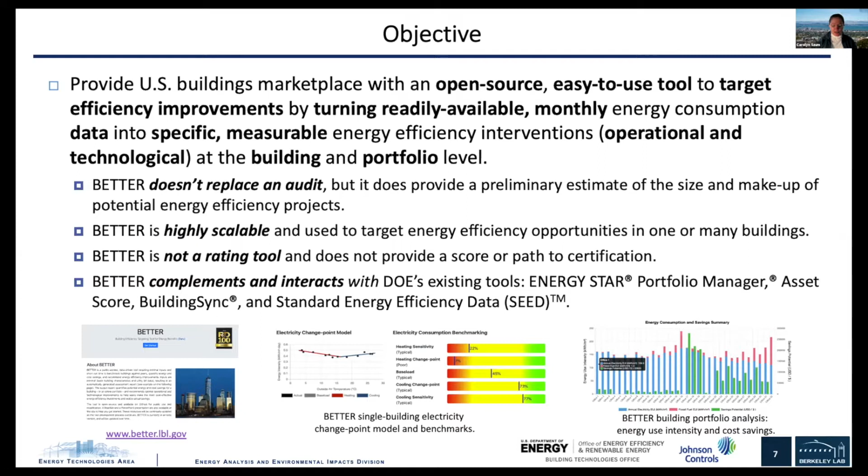Better is not a rating tool. It doesn't provide a score or a path to certification. And it's designed to be highly complementary and interactive with U.S. Department of Energy's existing tool set, including products like Asset Score, the Standard Energy Efficiency Data Platform, Building Sync, and of course, U.S. Environmental Protection Agency's Energy Star Portfolio Manager tool, which is being used by nearly a quarter of U.S. commercial space to benchmark performance.

So with that introduction to Better, I want to give you an overview of how Better works to, again, target and prioritize energy efficiency opportunities in buildings and portfolios at speed and scale.

Better takes in basic building data, and I'll talk a little bit about the data required to run Better in a moment. Weather data from the National Oceanic Atmospheric Administration database, and energy consumption data, so the monthly utility bill information. Better pre-processes this information and develops inverse models or change point models for each and every building entered into the analytical tool.

For those of you who are familiar with the ASHRAE Inverse Modeling Toolkit, you'll be well versed in inverse modeling, also referred to as change point modeling. But essentially what Better is doing is very quickly creating plots for each and every building, whereby the average daily energy use intensity for a building for any given month, or for the past 12 months, the past 24 months, the past 36 months, is compared to the average daily outdoor air temperature for that same month.

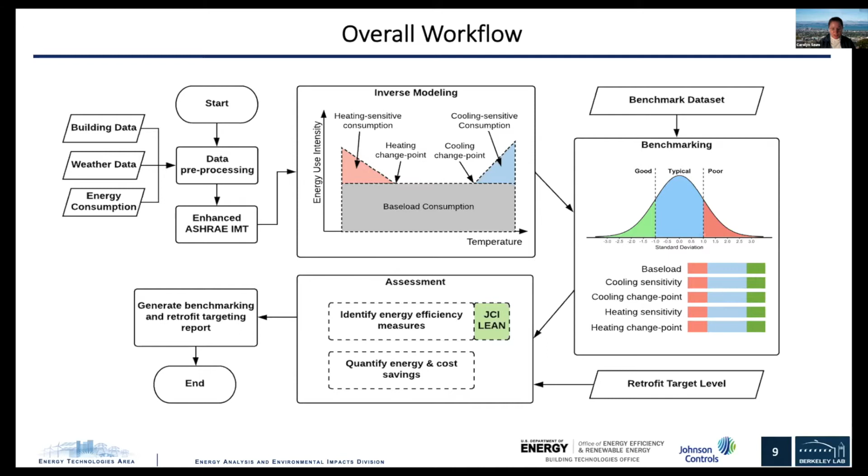So again, as I mentioned, Better is designed to be easy to use, and part of that means that we've tried to use as few data points as possible in order to allow for the quantification of energy and cost savings in a building and the specification of EE improvement opportunities. The data that's required to analyze a building in Better is a smaller data set than that required by Energy Star Portfolio Manager. So this is one of the advantages of Better.

We require a building identification number, the location for the building, could just be city and state or a postal code, gross floor area, excluding parking, primary building space type, which just refers to the space type that accounts for at least 50% of the overall building gross floor area, and currency, which allows Better to determine in which currency potential cost savings are communicated to the user.

In terms of energy data, Better requires at least 12 consecutive months of energy usage for all fuels used in the building, including the monthly billing start date, the monthly billing end date, energy type, energy unit, the monthly energy unit usage amount, and monthly energy cost is optional. It's encouraged because it will allow for greater accuracy in the estimated cost savings available from energy efficiency improvements.

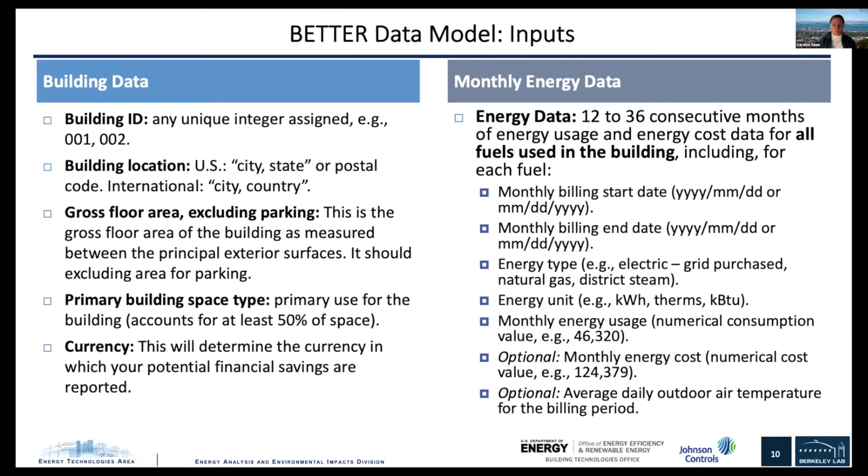So with that, I want to talk more in depth on the process for Better to quantify the size of the energy efficiency opportunity and the energy efficiency measures needed to capture those savings. So the way Better works, it's going to read the building information input by a user, the address, the space type, the floor area, and the monthly energy usage information.

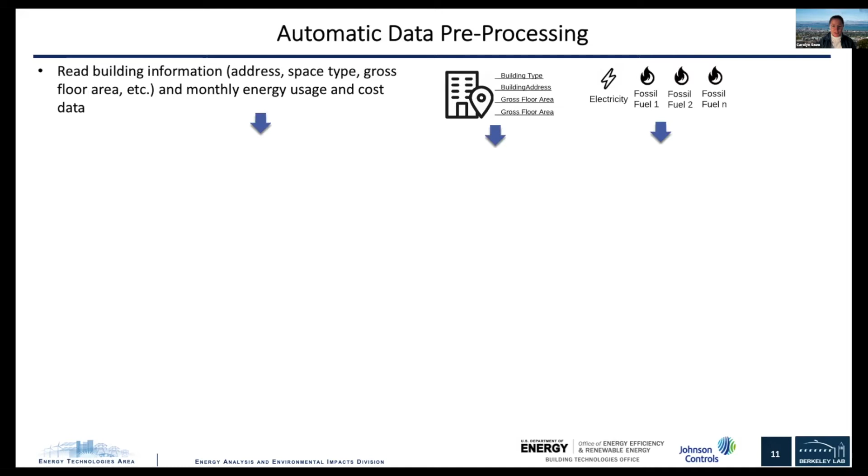Better will then search for the closest weather stations, and at the same time, it will be combining different types of fossil fuel consumption and converting that energy consumption into a single unit. On the back end of Better, we use kWh, but when we report out to users, we report either in kBtu or kWh, depending on whether a user wants to work in standard international units or imperial units.

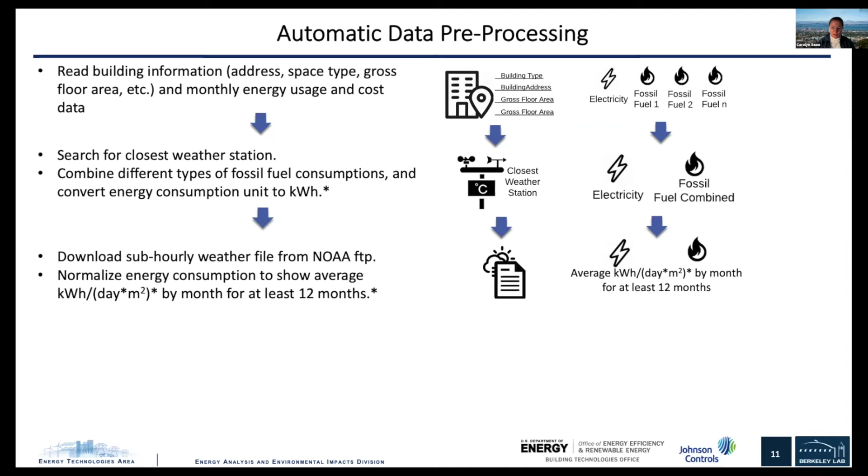Better then downloads the appropriate weather file from NOAA, and it normalizes energy consumption to show the average daily energy use intensity for a building for the last 12 months and aligns that with the average daily outdoor air temperature for those same previous 12 months.

With that, Better will generate any of the 4 following models, these schematics, these inverse models, which I mentioned earlier. And you can see in this graphic here the model types, the schematic plots, and the coefficients that can be derived from those schematic plots, and a brief interpretation of the schematic. So I'm just going to take the example of the 3P cooling model very quickly.

And again, we're looking here at a plot of the average daily energy use intensity as compared to average daily outdoor air temperature. So that horizontal line segment, the portion that you see there in the 3P cooling model, represents the baseload for a building, which is a combination of a building's lights, plug loads, and process loads.

The slope coefficient, that A1 there, is a function of the building's envelope integrity, the ventilation infiltration air, and the efficiency of the mechanical cooling system. And then that point, C1, the change point or the break-even temperature, is a function of the temperature set points in the building.

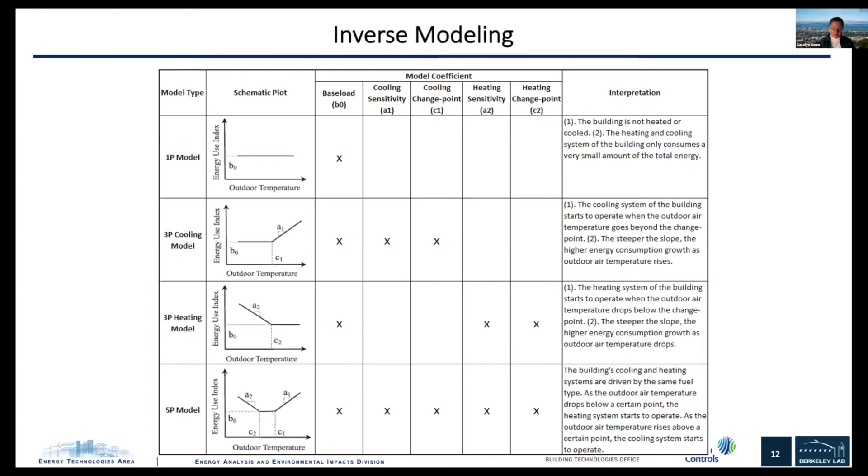Okay, so once an inverse model or a couple of inverse models have been developed for a particular building, Better develops a model for the electric consumption and a separate model for the fossil consumption. Better next will benchmark those coefficients. So let's take the example of electricity baseload. So Better has determined the electric baseload for a particular building, and it's going to benchmark that against the median and standard deviation for electricity baseload for a larger data set of buildings, either a user-defined data set or a data set developed by Berkeley Lab.

If the electric baseload for this one particular building is better than one standard deviation from the median, we would consider that to be good electric baseload performance. If that electric baseload coefficient is worse than one standard deviation from the median, in this case, higher than one standard deviation from the median, it's considered poor. Everything else is considered typical. In general, lower coefficient values are better, with the exception of the cooling change point, where we'd like to see a slightly higher temperature at which the building engages its mechanical cooling system.

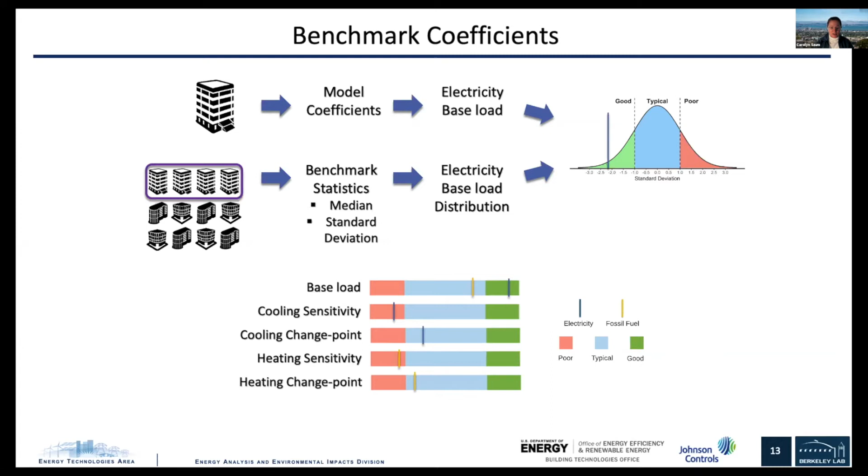In this example, the electric baseload is determined to be better than 2 standard deviations from the mean. It's considered to be good. Better applies this methodology for all 5 coefficients of performance for electricity and all 5 for fossil. And you can see in this lower portion of the slide here how this particular building performs relative to the underlying database for all 5 coefficients for electricity and all 5 for fossil. So in some areas it's performing well, in others there's opportunity for improvement. For example, fossil heating sensitivity and electric cooling sensitivity.

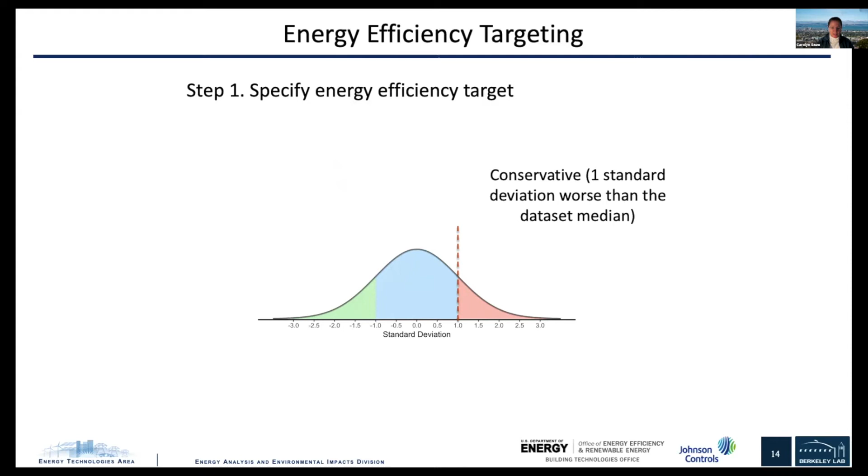All right, so as I mentioned, a user needs to specify the energy efficiency target as part of Better's overall analytical process. The user can define the energy savings level as aggressive, meaning they're looking for deep energy savings, whereby Better sets a target coefficient level as 1 standard deviation better than the data set median; a nominal target, which in this case is equal to the data set median; and thirdly, a conservative target, where a user defines the target level of energy performance for each coefficient as 1 standard deviation worse than the data set median.

Next, Better is going to define the facility improvement measures or energy efficiency measures necessary or recommended for a particular building to improve performance. So let's take the example of electric baseload once again. Example A, let's say the electric baseload for a particular building, the model coefficient is determined to be in the poor range. The target that a user has set is nominal. Because our target is superior to current performance, Better would select appropriate facility improvement measures to improve that electric baseload. That might be recommendations for improving lighting efficiency, for example, in the building. I'll talk about that more in a moment.

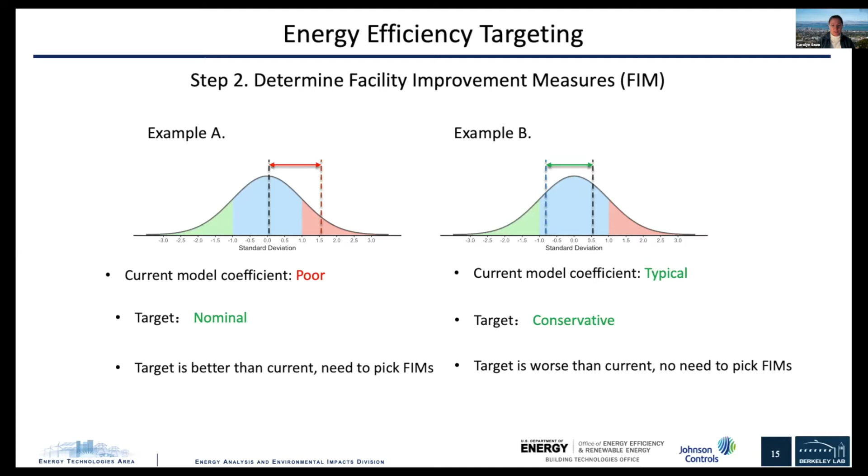In the second example, the current model coefficient for electric baseload in a building is found to be typical as compared to the underlying data set. The target level that has been established is conservative. Since the target is worse than current performance, there's no need to select energy efficiency measures. So Better won't recommend anything to improve electric baseload. All right, so energy savings estimation.

Once the facility improvement measures have been identified, Better then calculates potential energy and cost savings. So we'll take the example of heating sensitive consumption. And let's say that Better finds that the current heating sensitive consumption for a building is worse than the target. You can see that's a very steep slope as compared to the target, which is a bit more gradual. So some facility improvement measures or energy efficiency measures are suggested to reduce that heating sensitivity.

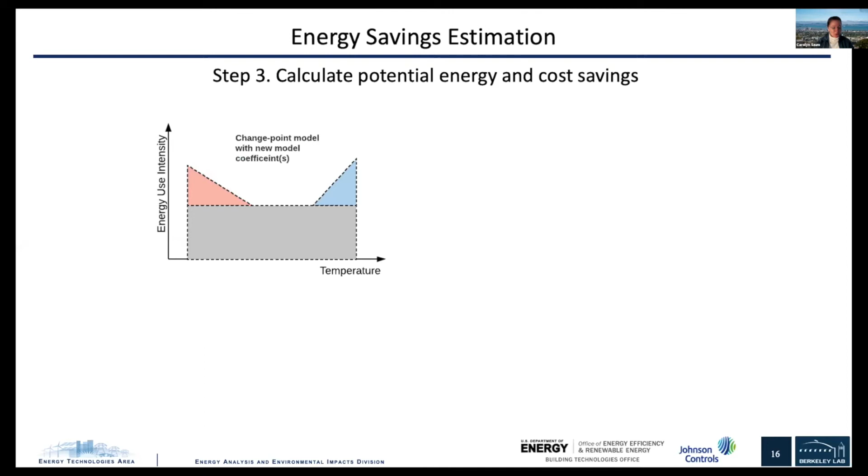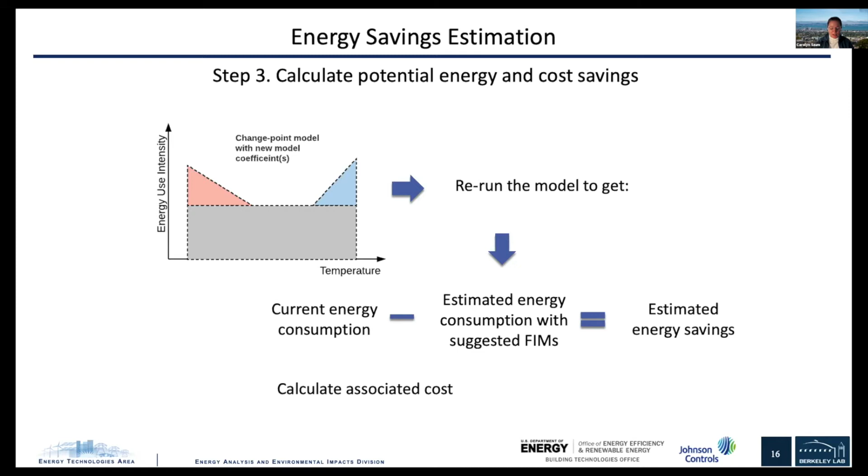A new change point model is developed by Better with the new and improved coefficient for heating sensitive consumption. Better will rerun the model to get the estimated energy consumption associated with the new model coefficient. It'll take the current energy consumption for the building, subtract from that the estimated energy consumption for the building, assuming all recommended facility improvement measures are being implemented, and assuming we're moving to the appropriate target model coefficient for all of the 10 coefficients we've been discussing, and then calculate estimated energy savings. With that, it'll calculate an associated energy cost savings based on either the utility bill information input by a user or proxy fuel price information.

Here I just show how the model coefficients for a particular benchmarking exercise would map to the specific energy efficiency measures recommended by Better. At this point, Better suggests up to 14 energy efficiency measures. These are sort of broad categories. We've developed more granular training information for users, which break these down into about 25 no-cost, low-cost operational improvements that can be implemented by building operators to capture savings immediately, and about half a dozen or so investment-grade energy efficiency improvements.

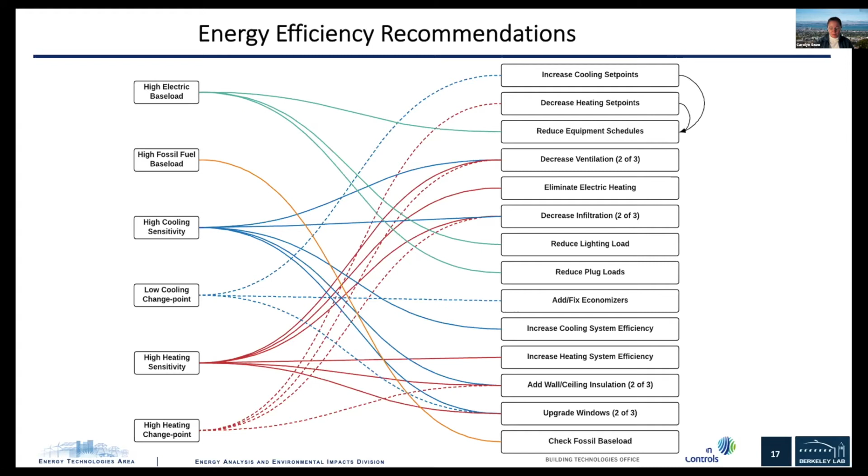But the way this works, again, we've been using the example of electric baseload. Let's say a building has a high electric baseload. Better is going to recommend measures such as reducing equipment schedules, reducing lighting load, reducing plug loads. In another case, let's say a building shows a low cooling change point. Better may recommend increasing cooling set points, adding or fixing economizers, or upgrading the windows in the building. So it's a little mapping of the model coefficients to the EE measures.

So now I'd like to do just a quick live demonstration of Better. And I'll move quickly here.

I know we're almost out of time, so bear with me while my computer moves here. All right. Fine, Carolyn, don't worry about it. Okay, great. And I want to note while you're doing the transition, we will have, if you're willing to go to the Meet the Speakers section after this, you can talk with. Oh, definitely. And then I think we are offering this so that people, instructors and others can try it out. You have a sample data set and so forth. Oh, fantastic. Great. That was my understanding. So this is the first chance to see how it works.

Excellent. So this is the Better homepage, and I just will mention we were recognized with an R&D 100 award earlier this year, recognizing Better as one of the 100 most innovative and disruptive technologies of the year. We also received a Lawrence Berkeley National Lab Directors Award for Tech Transfer because of our partnerships with industry to both develop and validate Better. So here's our homepage, a little bit of information about Better and value to users.

We also have a page, How It Works, which provides a little bit of explanation again on the change point models, the inverse models, the benchmarking, the derived EE measures, and the cost savings. And we've got a nice YouTube tutorial. It runs about 10 minutes to learn how to upload data and analyze buildings in Better. Some of our publications, and then lengthier training presentations. These are both in English and Spanish and provide information on how to develop a quick win strategy to improve portfolio energy performance in buildings, etc.

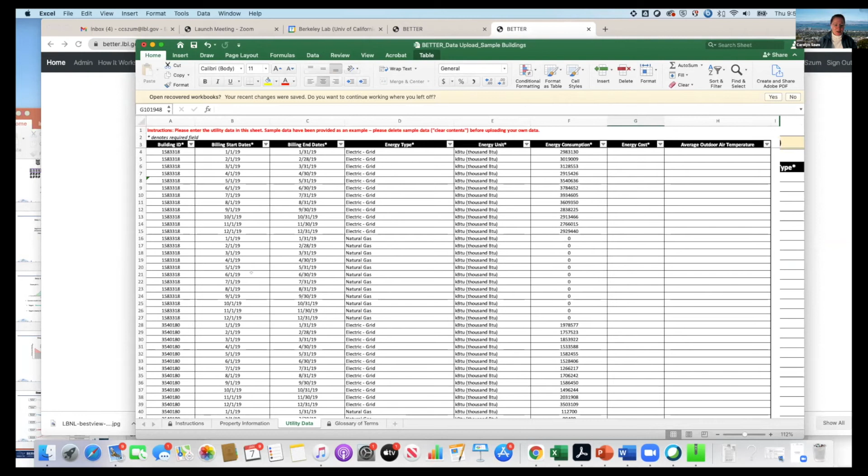And here I'm looking at a large portfolio. This is a sample set of buildings from Washington, D.C. And I'm going to show you how Better works to run data. So the other alternative way to enter data into Better is to follow instructions for downloading an Excel-based report generated by Energy Star that has all data required for a Better analysis, and then uploading it to Better.

If you have data in Portfolio Manager, this is an awesome and easy way to get that data into the Better analytical tool. I've done this a number of times. It's so easy. It's thrilling. So anyway, just indicate the type of template you're using to upload data, either the Better template or the Energy Star template. You then need to select the building type you're going to analyze. In this case, we're just looking at offices.

From there, you'll come to this page where you'll be allowed to select the savings target level. And as I mentioned, there are 3 potential savings target levels. We're going to choose nominal for this demo. The benchmark statistics, which are either default benchmark statistics, those developed by Berkeley Lab for either U.S. commercial office or U.S. K-12 schools, or Better will generate benchmark statistics based on the data you've input via the spreadsheets I mentioned earlier.

Also a minimum R-squared value, our default is 0.6, but a user can play with that a little bit and you'll see how it affects the energy and the cost savings levels. But 0.6 as a general rule of thumb is a good starting point for analysis. You click Run, it'll perform the analysis, and then you click on the Portfolio Output Report, and you'll come to a report like this. So we're analyzing a portfolio of DC office buildings.

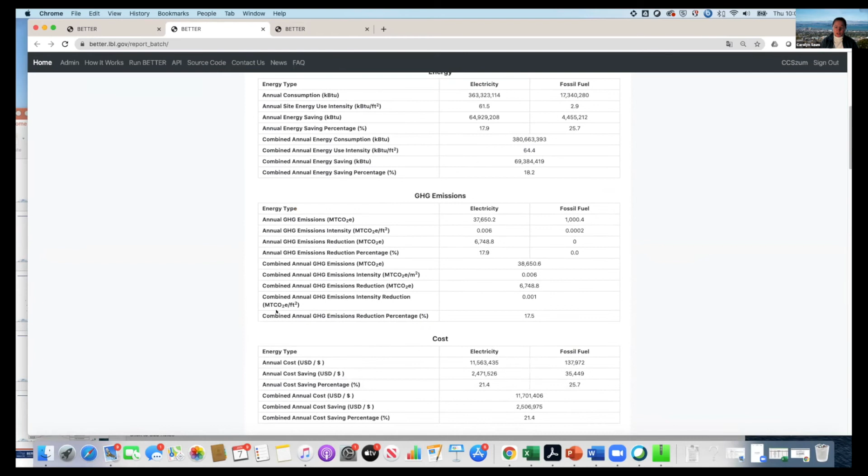We're looking at 26 offices, total floor area of 6.4 million square feet. Better identifies about $2.5 million in cost savings, 21%. 18% energy savings. You can see the breakdown between electricity and fossil here, and also greenhouse gas emission reduction potential. Additional metrics on the energy, greenhouse gas emission, and cost, both usage and savings for the portfolio are shown here. And then the top 5 energy efficiency recommendations for the portfolio.

And I love this because if you're a city, if you're a state, if you're a large corporation, you can very quickly understand the several things you could do across your portfolio, leveraging efficiencies of scale to capture these cost and energy savings here above. Many of these are no cost, low cost to implement, which is also wonderful. So we identify the buildings, we provide a short description, and then resources on how to implement the steps necessary to capture these savings or implement these measures.

Also, a benchmarking chart here, which shows each and every building that you've input into Better for analysis, and you can play around with this a little bit to compare one building to another in terms of electricity use intensity. You can very quickly find your laggards and also some of your leaders. You can add on top of that fossil or look at that separately. And then over here on the right y-axis for this graph, you'll see the savings potential.

And again, very easy to pinpoint those buildings that warrant further studies, site assessments, audits, or those buildings that indeed are performing well and offer lessons and best practices which could be shared across the portfolio to help improve portfolio energy performance. So that's the benchmarking graphic here.

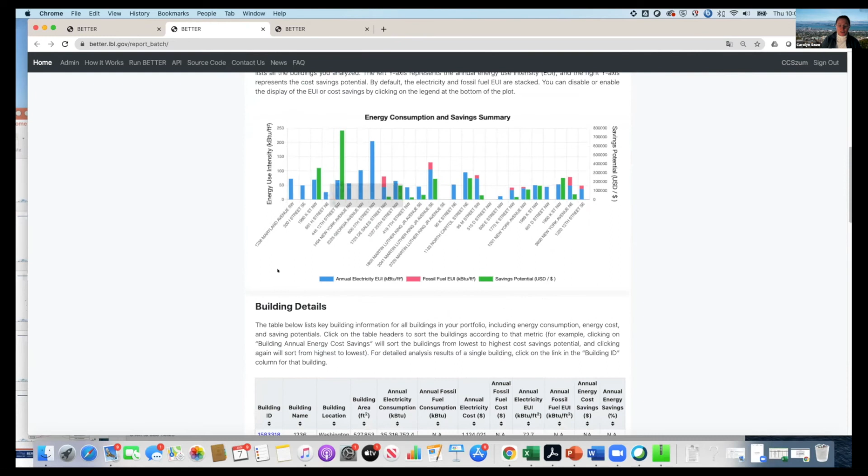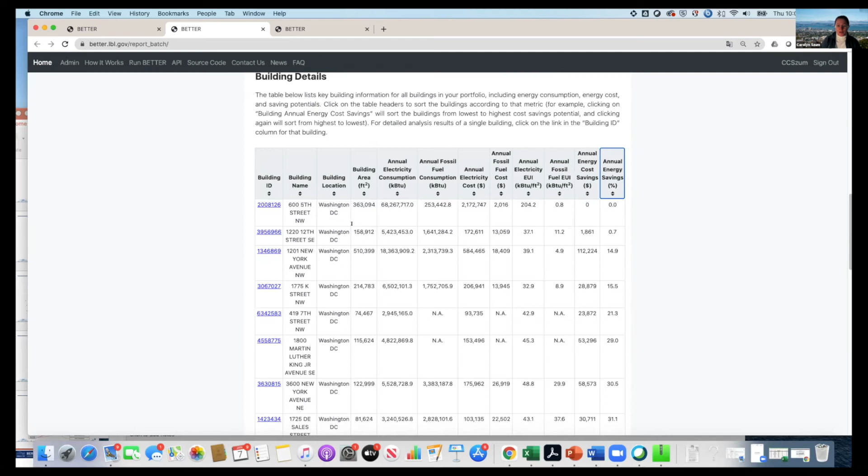Here's a sortable table which shows each and every building you've analyzed and allows you to rank based on annual cost savings or annual energy savings, allowing you to quickly select buildings that you'd like to further analyze for energy efficiency improvements. So I've selected 1775 K Street. This is a building in Washington, D.C. We see about $28,000 cost savings potential, 11%, energy savings 16%.

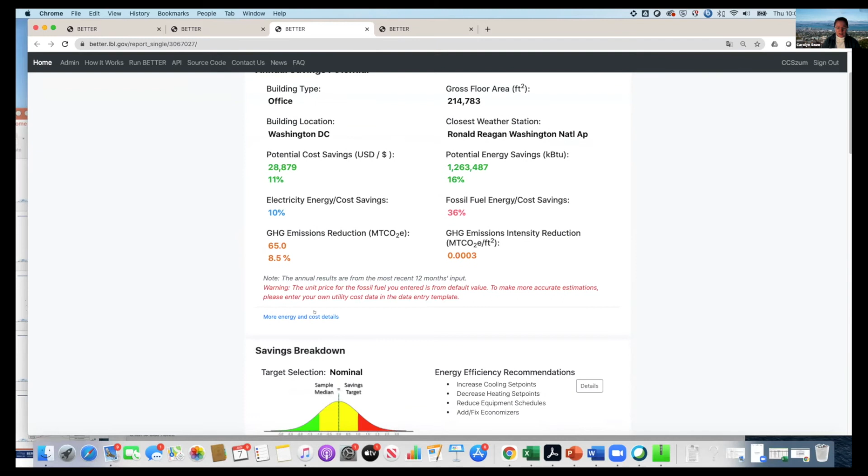We show the same details in terms of energy, greenhouse gas emissions, and costs, both consumption and savings potential. Here's the target we've selected, nominal. Here are the energy efficiency recommendations for this building. We also see a cost breakdown. So how are this building's costs currently divided across base load requirements in the building, cooling requirements, and heating requirements, what a typical building is using for a particular data set, and then where the goal is for this building.

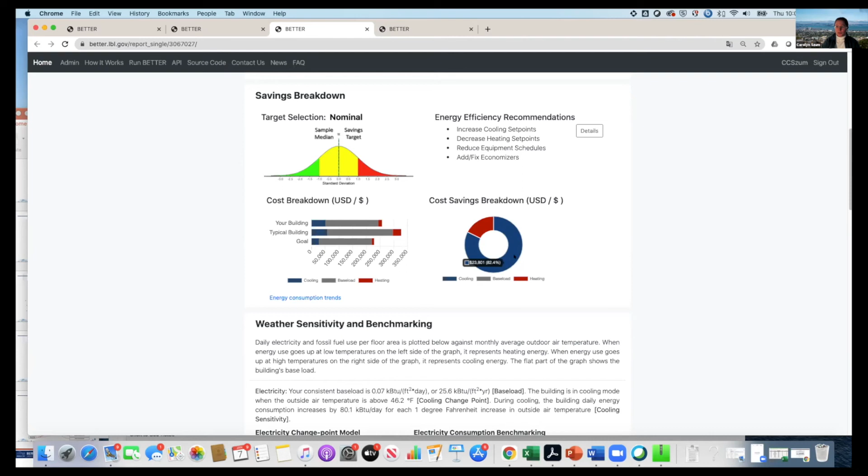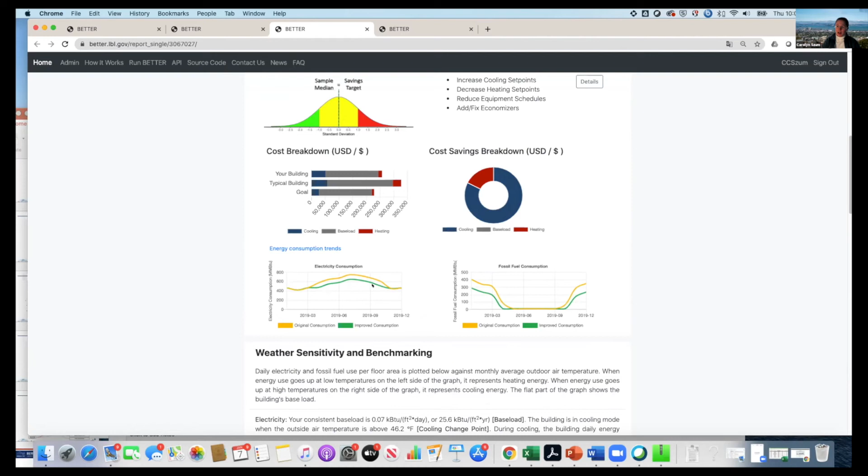Also here, cost savings breakdown. So most of the cost savings that Better is predicting would come from improvements to the cooling efficiency of the building. Consumption trends, so the yellow line showing current monthly energy consumption for both electricity and fossil, and green, improved consumption levels, assuming this building implemented the recommended energy efficiency measures.

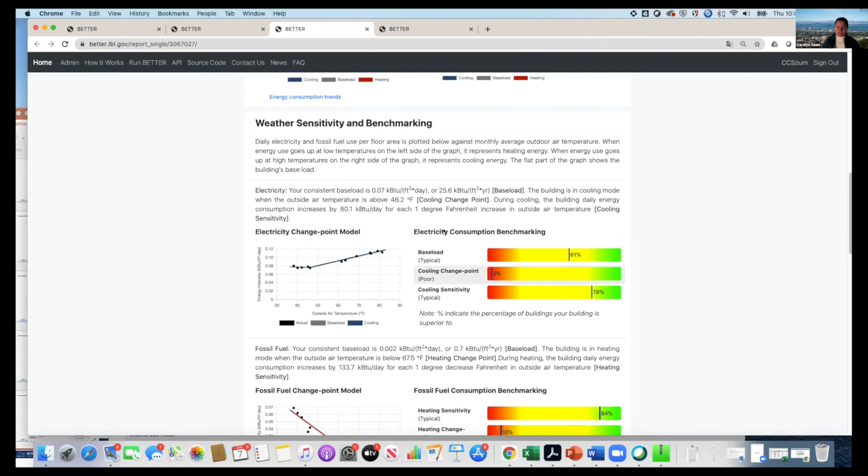We show here the weather sensitivity and benchmark. So these are the change point models. You can get a really good sense, again, for the last 12 months, what's been the average daily outdoor air temperature and what that has meant in terms of average daily energy use intensity for that month. And then you can see the model fit to those lines, the benchmark analysis for each of the coefficients, and we do the same for fossil.

Here we show the energy efficiency recommendations for the building, including the specific measure and recommended resources to support implementation of that measure. So in a nutshell, those are the reports, both the portfolio and the building level report. And now I'll just go back to the slide set here, and I think I've got another couple minutes, and I'll just show you very quickly.